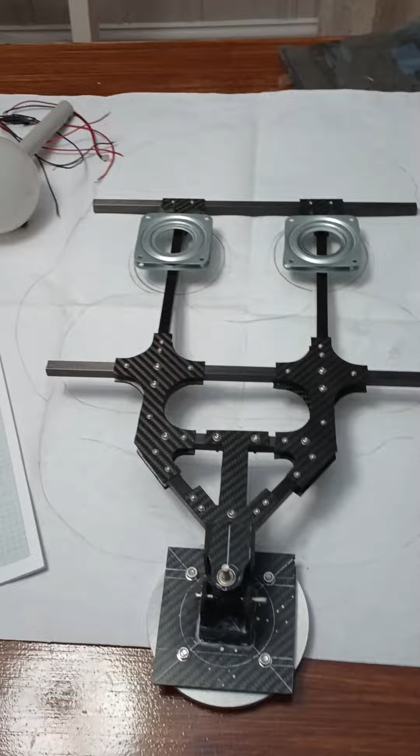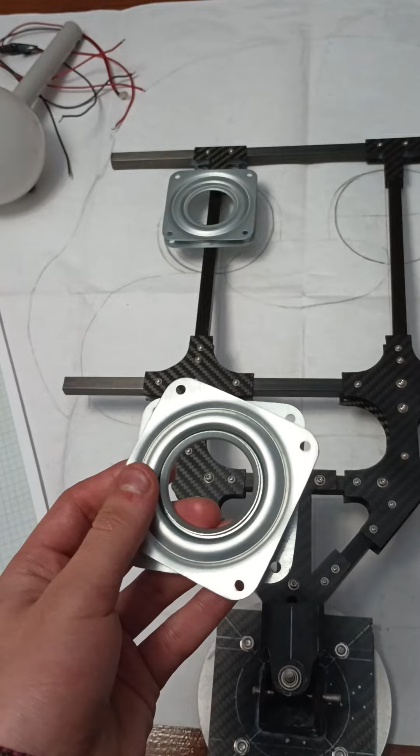I've been working here with my stuff and I've come up with an idea. I'm going to have a couple of bearings where the eyes are in the chassis, so the eyelids can swivel and give a little bit of better expressions. With Freddy here, we're going to be able to tilt the eyebrows and move them up and down.

Not only that, but we're also going to have the eyelids tilt. For example, the eyebrow comes right here, and it's going to be able to blink, but it's also going to be able to tilt like so, giving a much more complex emotion in the animatronic. That's going to give me a much more expressive eye.

So if I want him to be mad, I can just tilt the eyebrow like this, and he's going to be mad. I can tilt the eyebrow like this, and it's going to be surprised, or whatever. We can make much more emotions this way instead of just having the eyebrows do everything. We could also have the eyelids tilting around thanks to these.

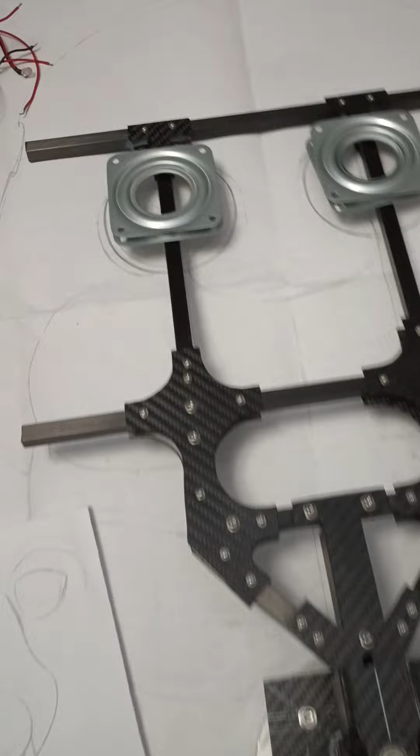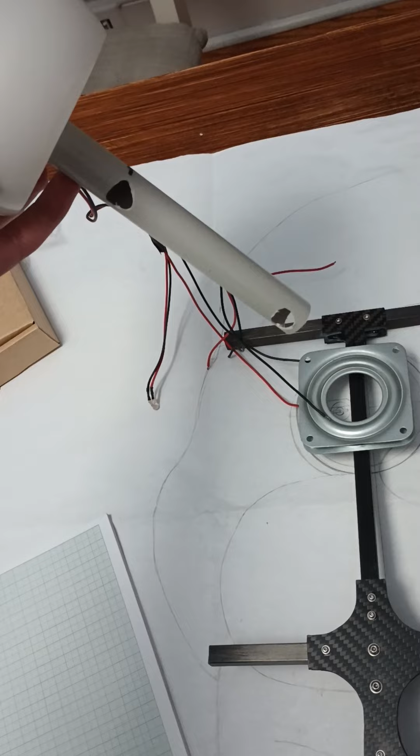Let me show you with the new eye prototype that I have in this box. Let me open it up and get it out of here. There we go. So this has clear plastic instead of an iris like that one, because currently I'm trying to find a way to glue these two pieces together and have a clear view for the camera in there.

There's going to be a built-in camera in one of the eyes, and in the other eye there's going to be a person sensor, which is basically a face recognition software that I got my hands on. It's a very tiny, teeny tiny module.

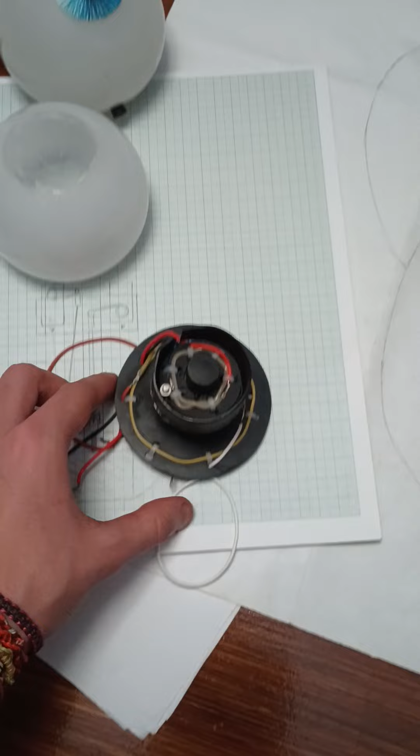So this is the eye prototype, this is just the shell, and these right here are the flexible LEDs. We have a white one here and a blue one in there, so when I connect them, the iris glows blue and the rest of the eye glows white.

Now I'm going to add also a second filament around here that makes it glow red, like in the movies. This is the prototype for the movement.

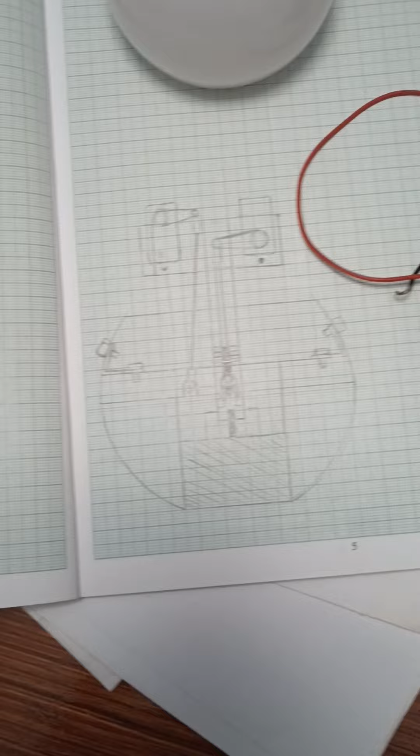So basically, I'm going to just grab this thing. You can probably see it right there. That black shaded thing is this same chamber, and that lines up pretty nice and tightly right there.

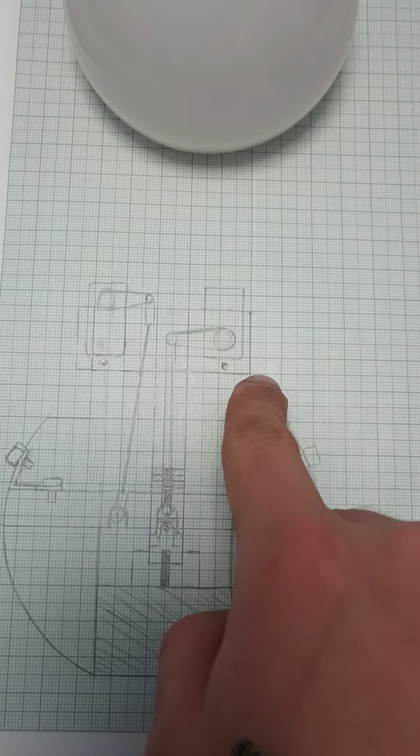Those two things right here, this one and this one, are basically the servos that are going to control how the eye moves. We're going to have one servo that controls motion left and right, tilting, and then up and down, which is also tilt. The center of the tilt is going to be what you could call a pivot.

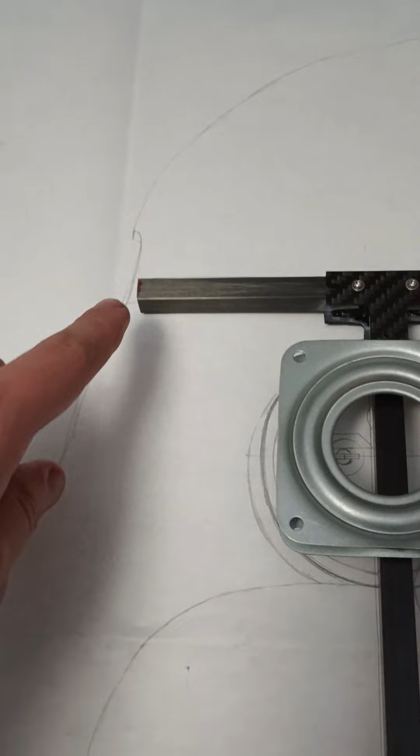It's actually a universal joint, which we have right around here. So I have 4 currently - 2 are for the eyes, 2 are for the ears, which are these sockets right there. You can probably see the hole on the drawing, and it lines up pretty nice.

And that's basically it. Right now I'm working on how I could have the eyelids tilt at the same time as the eye itself is not tilting. I just want the eye to move up, down, left, and right, just like a regular eye. And the eyebrows are going to tilt as well as the eyelids.

What do you guys think? That's a pretty cool concept, huh? I actually got it from a little friend called The Regular Sauce. That guy did the same thing on his Funtime Freddy.

I thought of doing that, but I considered it too complicated for me to do because I currently don't use 3D printing technology. I do all my pieces by hand, but now, looking a little bit into his design, I think I came up with a way that I'm going to do it.

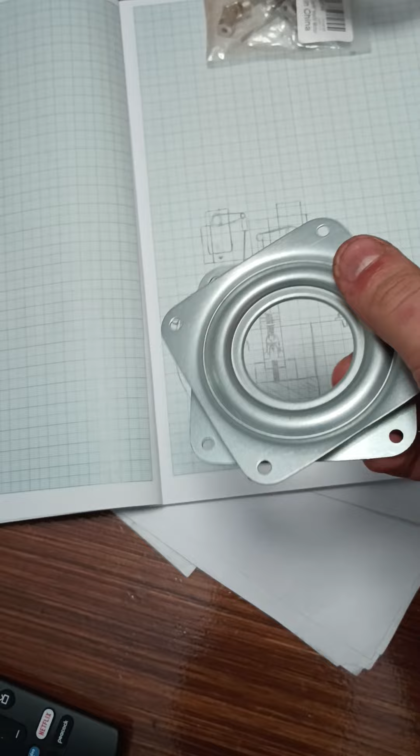This bearing right here is going to come behind this. So there's going to be a shaft where this eye connects to it, but the eye is only going to be connected, as I told you, to the main chassis, so it's not going to tilt.

And the eyelids are going to have something like a bracket around there, around the eye, so it's not going to touch the eye. It's just going to be able to tilt around it like so. It's going to be able to tilt, and it's going to give us a better expression.